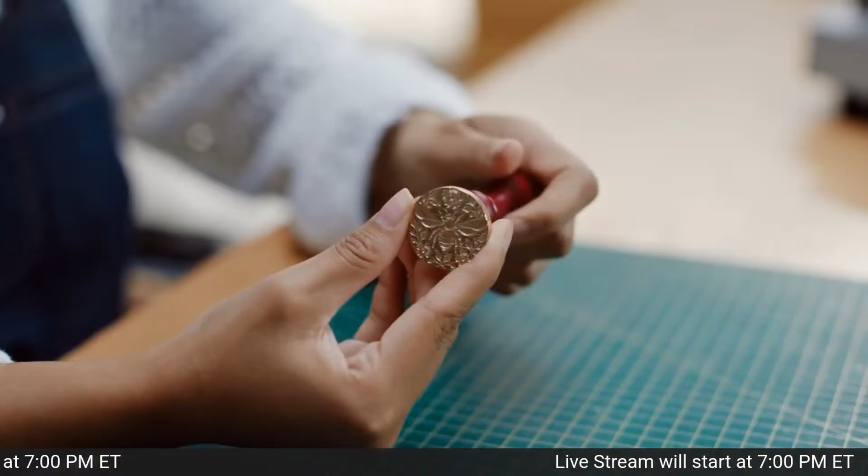And I'm on a roll. If the leaves turned blue and all the rivers dry, all I hear is you're at my side. And when I think of you, all I can do is try to keep steady. Thought of you, thought of you.

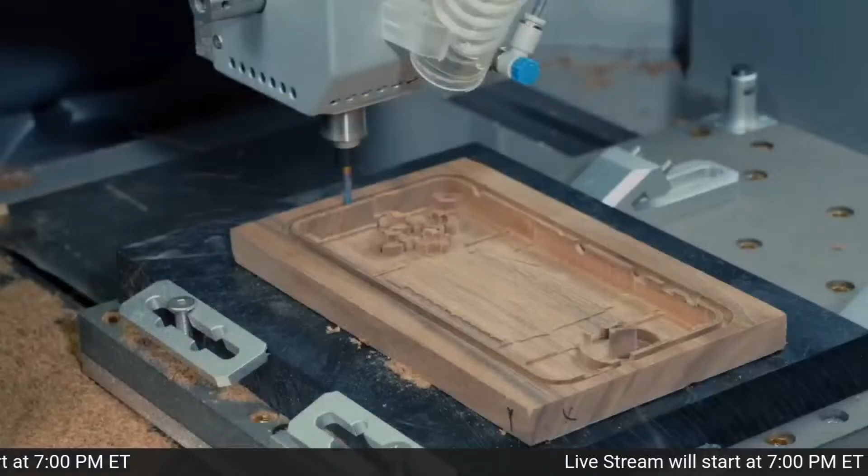And I'm on a roll. If the leaves turned blue and all the rivers dry, all I hear is you're at my side. And when I think of you, all I can do is try to keep steady.

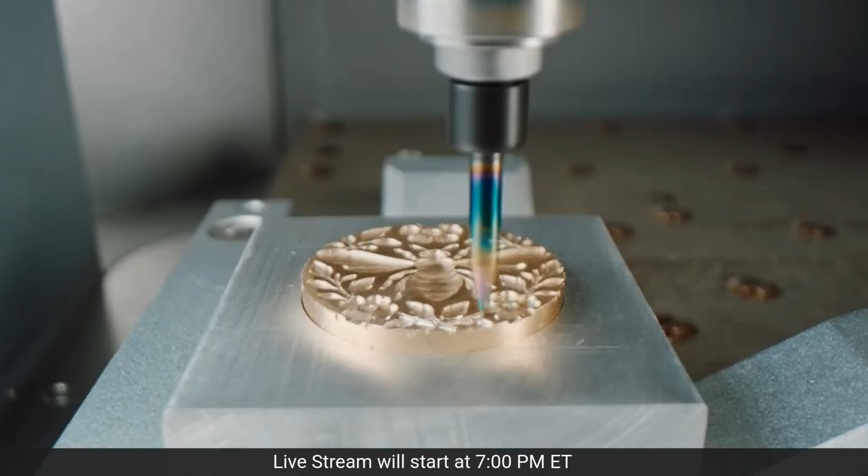And I'm on a roll. If the leaves turned blue and all the rivers dry, all I hear is you're my side. And when I think of you, all I can do is try to keep steady. Thought of you, thought of you.

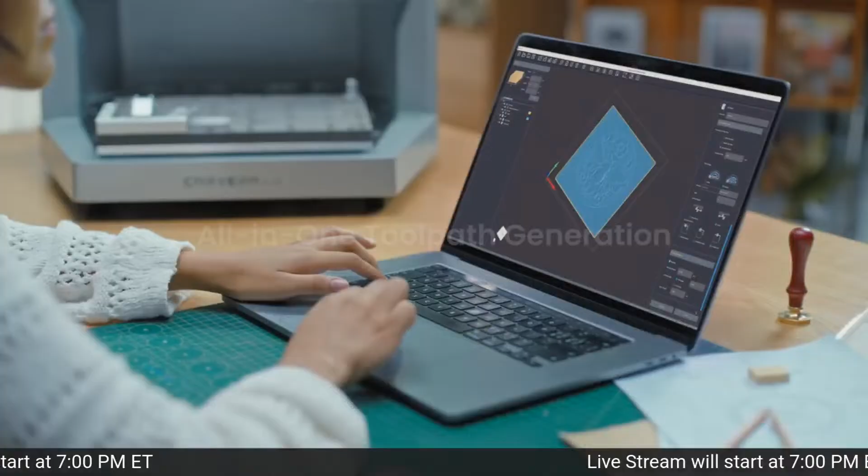And I'm on a roll. If the leaves turned blue and all the rivers dry, all I hear is you're my side. And when I think of you, all I can do is try to keep steady.

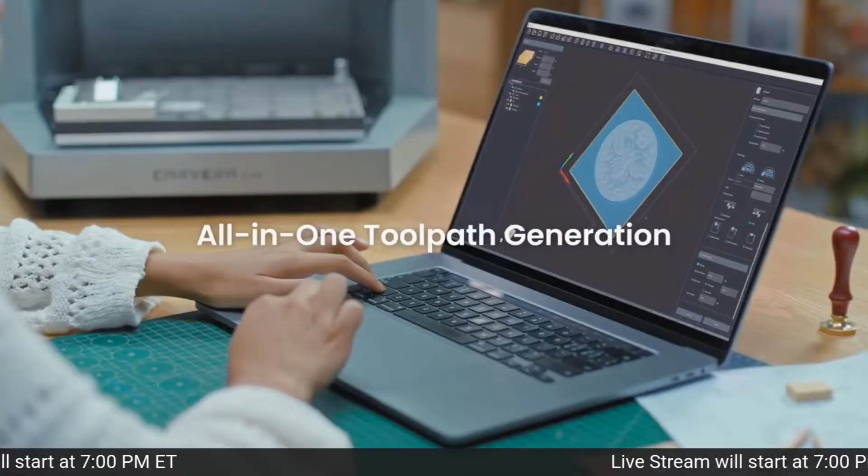And I'm on a roll. If the leaves turned blue and all the rivers dry, all I hear is you're my side. And when I think of you, all I can do is try to keep steady. Thought of you, thought of you.

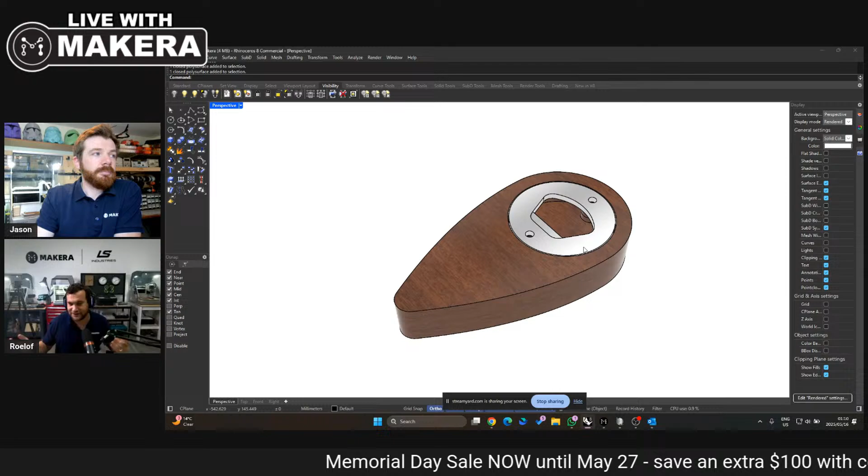As much as we like CNCs, maybe you guys can say if we have like a full-on live stream where we're just milling things for like, maybe a 24-hour live milling stream. How's that, Jason? What do you think of that? I think that's something we'll put forward for the future here. Yeah, maybe I'll put a bed down here as well, something like that, so it's just machines running.

So basically I kept it simple with this. It's a wooden piece, I didn't put any chamfers on it, it's just a cutout. And then I've got an aluminum piece, brass, or like an aluminum insert that just goes into this, and then that just gets screwed to this.

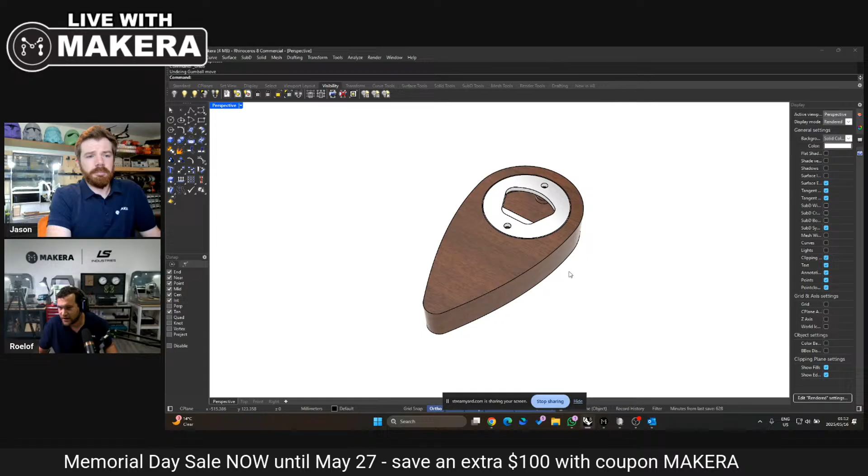Obviously, you can interpret this and change the model. The model is available on our wiki, so you can have a look at that. You can also find the DXF of these online, so there's many ways you can import this into the CAM software—either in a 2D file or a 3D file. I'm going to focus on it as 3D, just to focus on those features in the CAM. But there are tutorials; Jason's putting things out to make this in 2D and also in 3D, so there's many ways you can look at this.

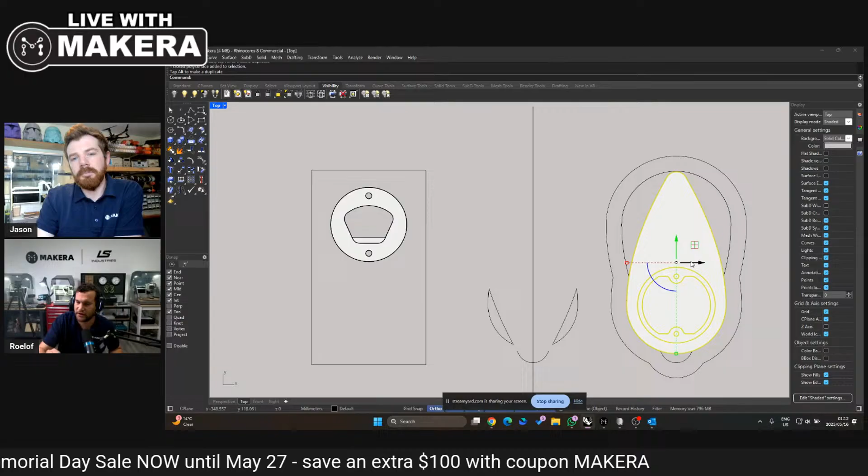A cool thing I want to show you, if you're going into 2D, you can actually do this in 3D too. This is just the top view of this model. If I place this model and put an offset here of an eighth of an inch bit, a cool thing—if you want to mill this double-sided—is you add an offset to the mirrored side of this part. If you fit this in with the correct offset, you have an insert that's milled like this. You can rotate this part and place it into the cutout of the part, which actually saves materials—you don't have to cut jigs or alignment pins.

It's just a different method of doing a double-sided mill, but we're not going to focus on that. That's just a fun thing I wanted to show you guys that I figured out with this part. Okay, so let's get right into this 3D part.

I'm going to actually open up the CAM software. First of all, as you can see here, let's go back to the model. What I did here is I actually drew in the size of the stock.

I already mounted my stock to the material and measured it. You have to make sure the thickness is 100% correct. If the thickness you set up in your CAM software isn't 100% accurate, then you're going to have air cutting or things like that. So you have to make sure these values are correct.

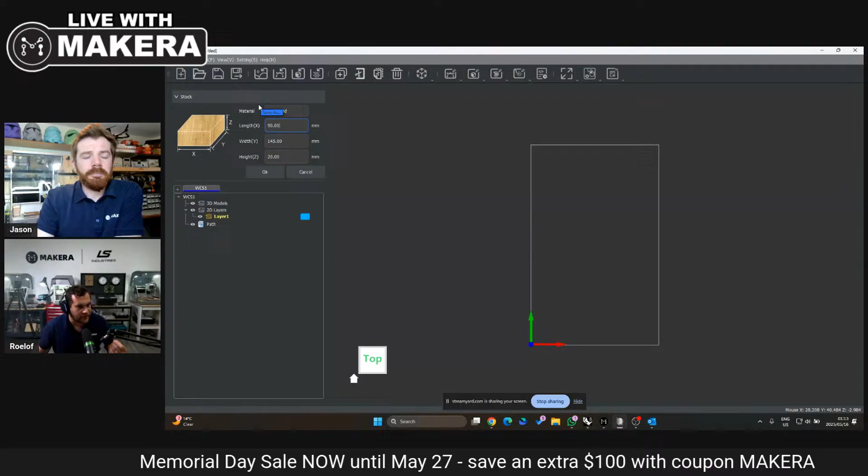Obviously we're going into hardwood, and my width in X is 90 mil, Y is 145, and 20 mil thick. And then I'm just going to import the 3D model, the handle, open up, and there we go.

Now, to move this around, I just hit M on my keyboard—it's an easy way to move things around. Then you can quick align the stock, which is already done. I always have a look at this in 3D just to make sure everything is placed correctly. If you look at this, the stock setup is exactly the top surface of this model, and the bottom is exactly the bottom surface of this model. So just keep that in mind when you're doing this.

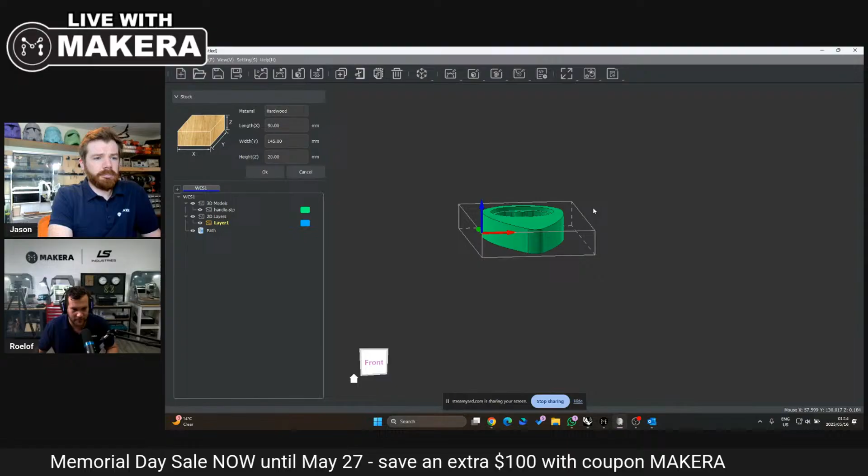You can rotate, scale, mirror—you can do other things with the model here. Mine is already in the correct position, and my origin is also in the correct position, as you can see here. Now this has already got a built-in offset, so you can see a measurement here and a measurement here.

If you want to double-check these measurements, you can always jump back to the CAD to make sure this size and that size is correct. If you go back to the model, to make sure what sizes of tools I'm going to be using, you always have to look at the model and be like, okay, this is 4 mil, so I can cut that with an eighth-inch tool, which is 3.175. So you always have to make sure the tools you use are the correct thickness for the part you want to mill.

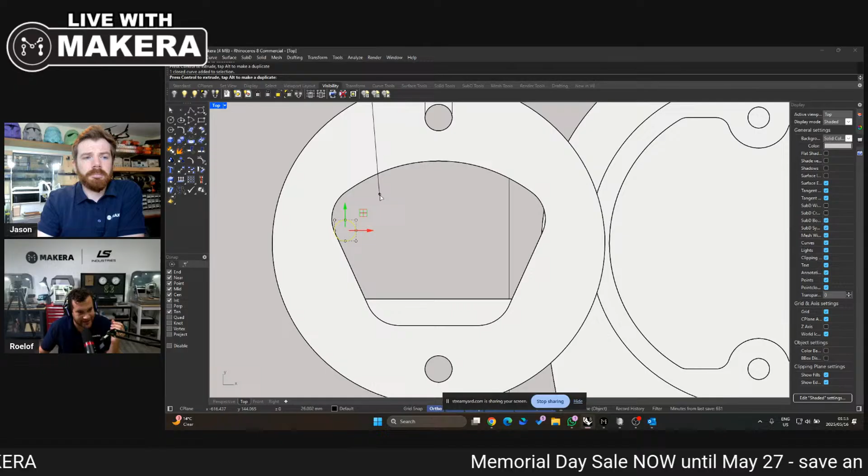You can also, if you want to make sure things work out 100%, say the tool is 3.175—I actually draw a circle representing the tool. So if you imagine the tool can fit into this... if you have, for example, a text or something smaller, you can check, is this bit actually able to cut that radius? Over here, I can actually see it will cut that radius.

The only part that will be different will be a small radius on the inside of this corner. At the top, it's just a little pocket, a 0.5 mil pocket. So that radius can still follow. The only difference on your part is the inner radius of this angle.

This is a fun way to check, or a good way to check if the tool you're using can actually cut the part. If the tool is too big to cut a hole, it won't give you a tool path because it's not possible to cut it.

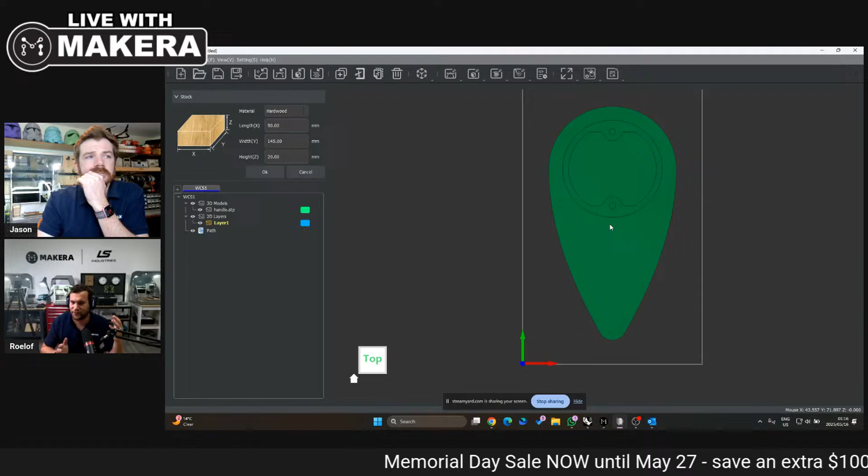So let's jump back to the CAM. I usually jump back and forth between the CAM and the CAD software just to make sure everything is aligned and everything is the way that I want it to be.

Okay, so let's go into creating a toolpath. I'm going to go to 3D and start off with a pocket, which is this first step, from the top surface to this step. I'm going to create a 3D pocket. Let's delete this tool for now, and add single flute non-metal, 25 mil, 3.1, in hardwood. I select this, and the start depth is at the top of the top surface.

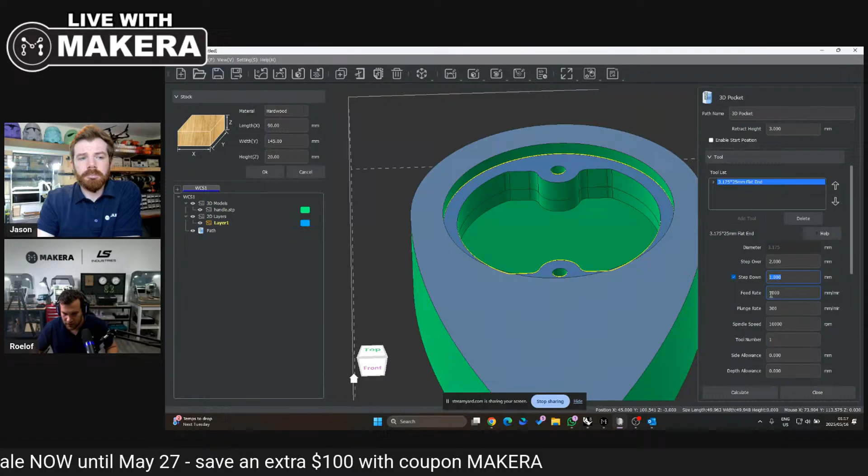Clearance height, I'm not going to mess with that, it's already been set up. Step over 2 mil. Step down is ticked, so every step down is going to be 1 mil. I think I'll make this 2 mil. Feed rate, I'm not going to change anything here. Spindle speed is already set up for the material.

I'm going to cut this as an offset strategy. The difference is parallel will machine this pocket horizontally, and if you use an offset it uses the circular feature, so it mills from the inside in a circular motion. We're going outside in, that's fine, on the inside of the boundary, and we're not going to add ramping in this wood. Then we'll calculate this.

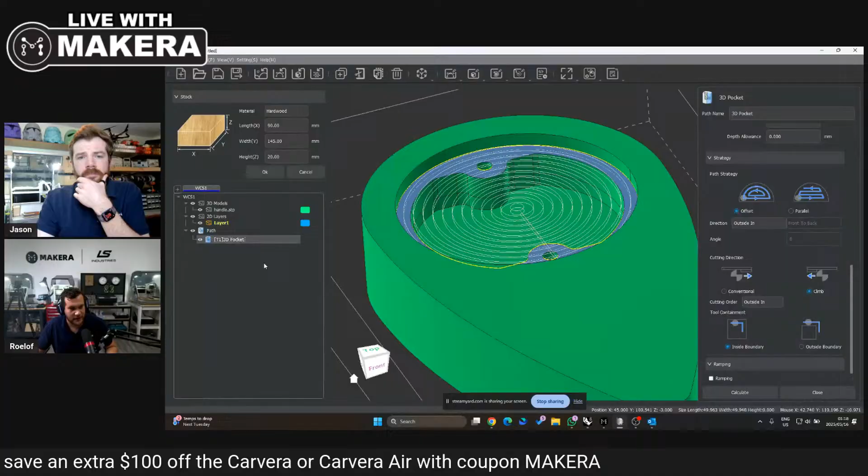There you can see we have a 2 mil - that top white line is the 2 mil, and then it will finish off with the second line that covers that. So that's the first pocket and our first tool. I'm also not going to use a tool change in this part because we're just focusing on making this, and I can make this with only one tool, so there's no need to complicate it. We're happy with that.

I'll close this, and go back to 3D path, and do a pocket again. I'm going to select this bottom surface. Now all the information it has is the bottom surface, so at the top here you need to tell the CAM that it doesn't have to mill the top 3 mil, because I already did that in the first pocket. So my start depth is at 3 millimeters.

Is everybody still good? Is my sound okay? I'm just going on now. Yeah, Jason, you're doing well, Roelof. All sounds good. All right.

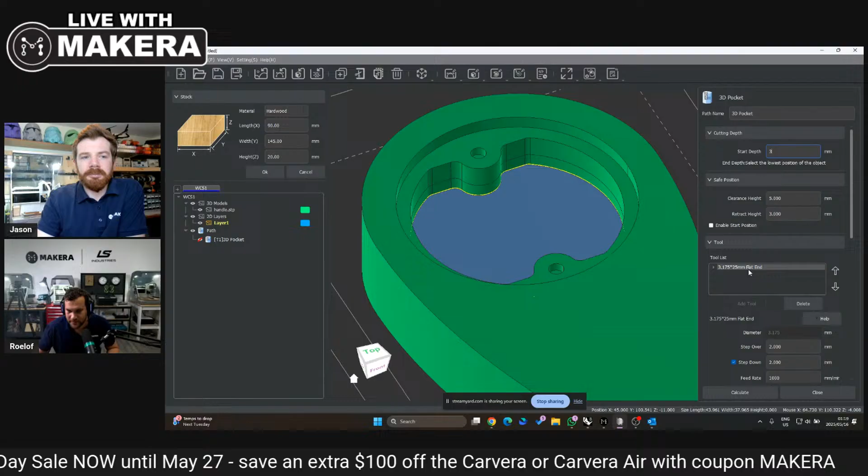I'm going to start at 3 mil down from the top surface. Clearance height is already set up, that's the correct tool, step down 2 mil, and that's set up. I'm also going to do the offset the same way I did earlier: inside boundary, no ramping. Calculate.

Then you can see from the top, it uses the contour of that line on the outside of the surface to calculate that. So that's pocket number 2. Let's hide that, close, and then we're actually going to do another pocket.

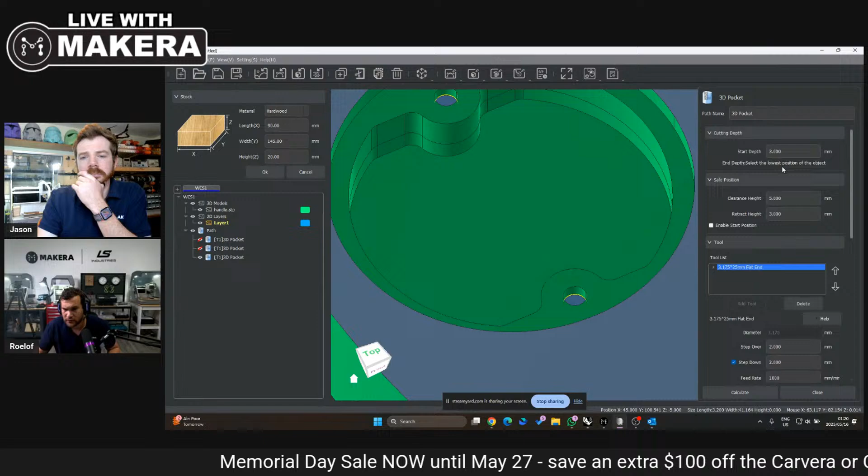I'll select that surface. Start depth is at 3, and then clearance height - I'm using that same tool. That's fine, so it'll go in a circular motion and create that pass. It's also an offset inside the boundary, and let's calculate that. Let me just make this 0. There is the line.

Okay, so that's the little guide for the holes for the screws. Let's hide that. And then finally, we're going to do a 3D path.

We're going to do a contour just to cut out the part. I'm going to select the objects and the part, generate the contours, which is only this outline. I select this outline. Start depth will be on 0, end depth offset I'm just going to make this -1, so it actually goes through the material. And you can actually cut out.

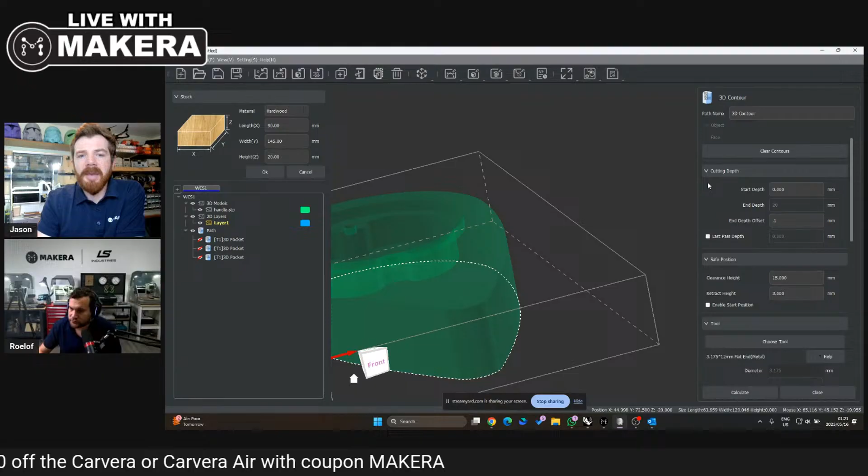I want to point out to everyone what Makera CAM really just did there. When you generated that contour, which is a pretty cool thing, and you'll see us do this again later on with the cap part, Makera CAM basically scanned the 3D model that was imported and found the edge profiles. Because when you create a contour cut, you really want to follow some type of vector line, like a 2D line, just to either machine the outer part or clear something out on an internal feature. So Makera CAM will automatically generate those around your imported STP files to make creating different toolpaths really cool. Roelof just selected the whole object there, and it automatically found the outer profile.

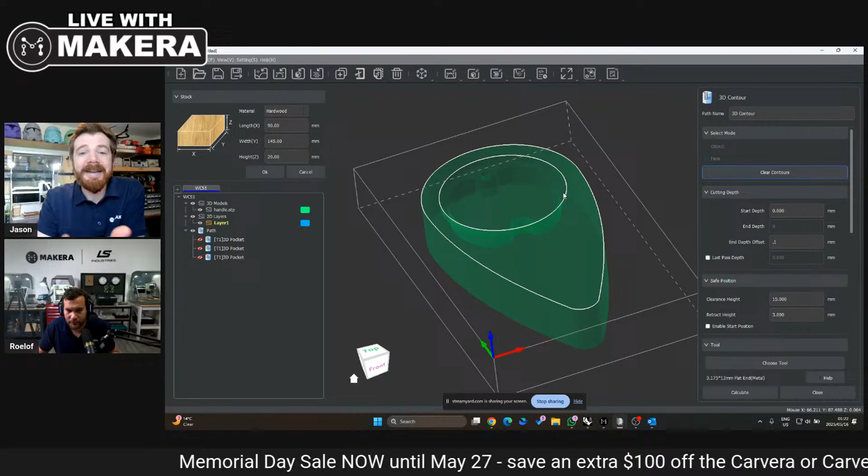But you can also select faces and things too if you want to generate contours, let's say for example a chamfer or whatever. So you'll see when he clicks on that top face, now it found the outer lines of the pocket and the other edges, which might be handy to do some type of chamfering pass or something like that, which we're going to do in another part later on. I didn't want to jump in there too much, Roelof, but that was a really cool feature that I think a lot of folks don't realize how easy it makes for creating your toolpaths on a 3D model.

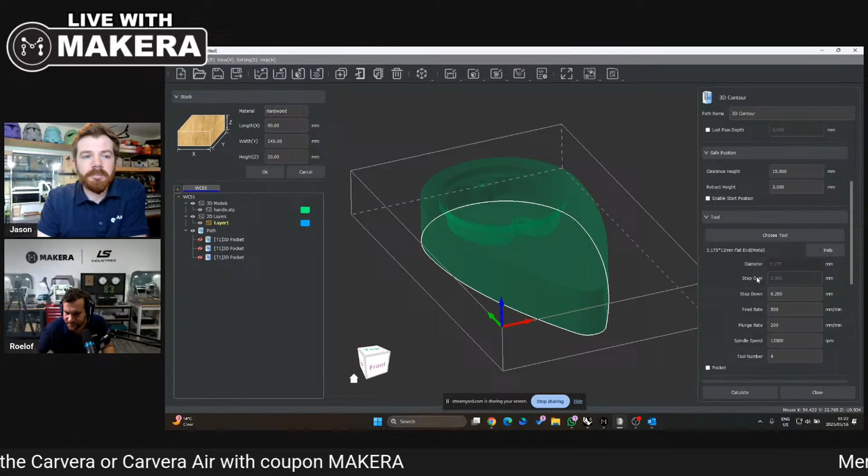Yeah, and the STP file is usually flat surfaces, so you can use this to capture many different areas and then specify this specific area on that part needs to be milled this way and that way. So it's a pretty powerful feature. For now, I'm just using it as an outline, but it can be used for many different things. So yeah, cool feature. Let's just jump back into the tools.

I'm gonna go non-metal, single flute, 25 mil, hardwood. Select that tool, and I'm going to step down 2 mil. I've already milled this, and I've seen that 2 mil is fine into this material. I'm not going to add ramping to that. I will add a tab to this though, and the strategy should also be on the outside of that contour, just to make sure it's exactly the same size that it should be. So I'm not going to put any offset to that.

Outside, let's add some tabs here. I'm going to do a triangle, and I'm actually going to increase this tab to, let's go 3 mil, let's go 4 mil. It's wood, so you can leave it quite some material to hold it in place because it can chip away that tab. In aluminum you can go a little bit less on the thickness of your tabs, or on some metals, because it actually holds it in place. But for wood, I recommend just increasing it a little bit more, and you can obviously sand it quite easily.

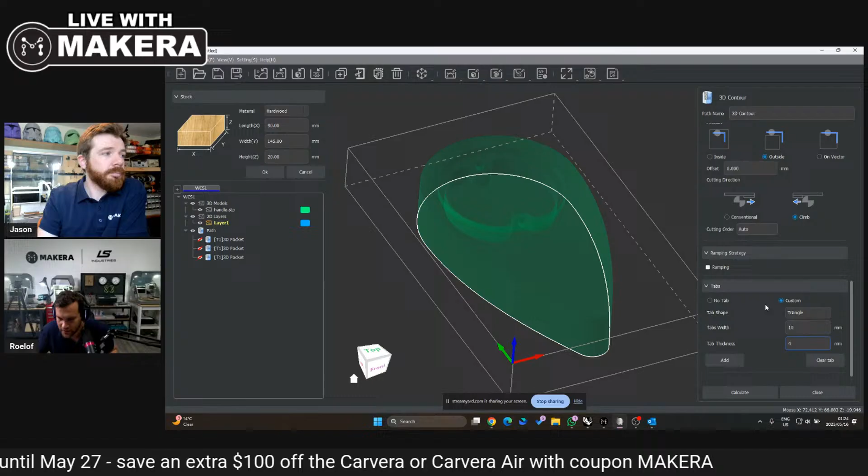So let's do a top view here. Oh, I don't think I've selected this. Let's just clear this tab, exit add. Okay, let's add a tab. I also recommend adding the tabs kind of concentric, or parallel to each other. To remove it, you can kind of pivot it on that axis to actually break it out. So if you put one here and there and there and there, it's harder to get it out. Depending on the size of the part as well, if it's bigger, you need a lot more tabs. So let's add that, let's calculate this.

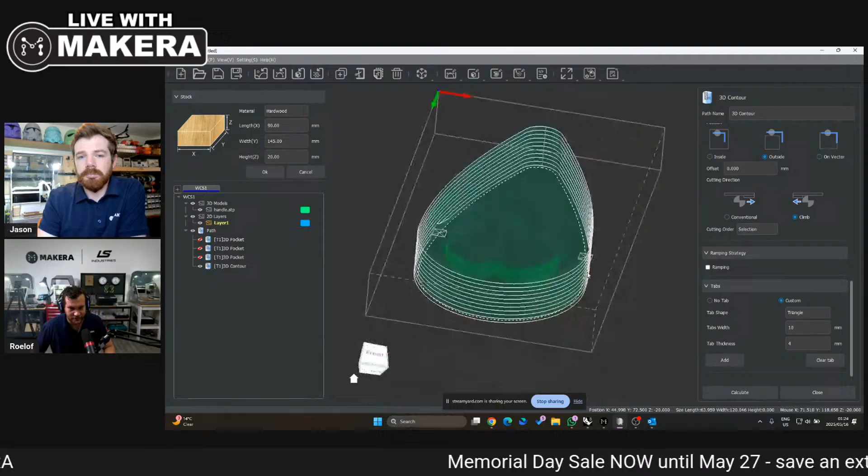And then what I'm going to do is just check the 3D viewer here, and I can see the tabs cut out there nicely and the tabs cut out there nicely. And if I do a front view, you can also see that it's cutting through the material. Now that's the end depth offset that I've set over here.

So that is the file. We have the pocket, we have another pocket, we have another pocket, which can also be a drill, but I'm just doing a pocket for that now. And then we have the outside contour. So as simple as that.

I'm going to go here to toolpath. I'm going to select all of them. All of them is the same 25 mil, 1/8 of an inch tool. So let's export that. I'll call this.

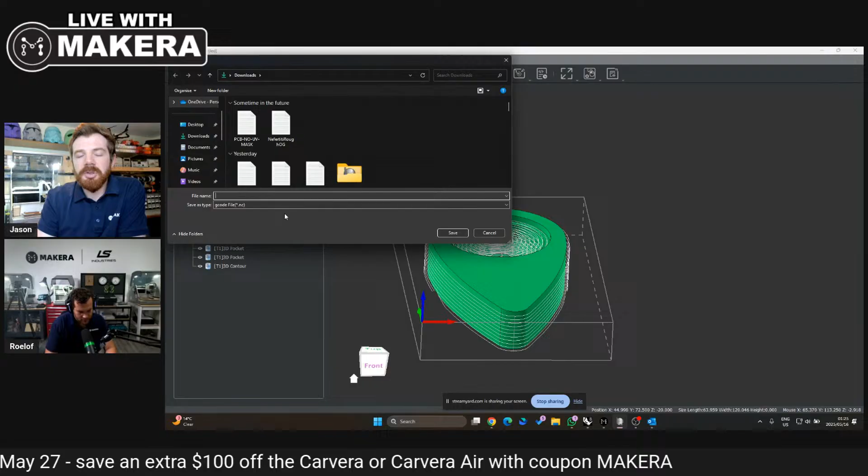As you save that G-code file, I want to point out a new update to Makera CAM. When you export your G-code, it shows you your tool list and tool numbers, and will warn you if you make a mistake choosing multiple tools with the same tool number. But it's easy to modify your tool numbers if you want a different order, or to match your Carvera's automatic tool changer. That's a pretty handy feature Roelof just showed.

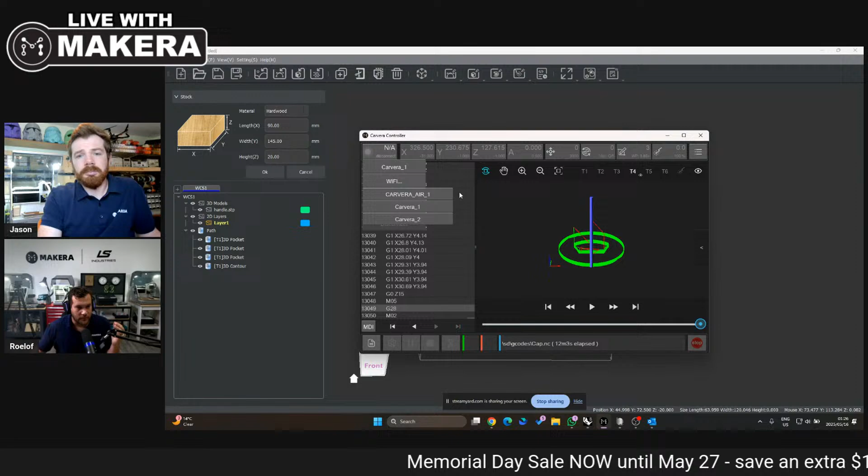Great, thank you. Okay, so now we have the G-code saved to my downloads folder on my computer, and I'm just going to connect Wi-Fi to my machine. I've already set up the stock on that machine. Let's connect again. There we go. When I connect to the machine, I always do a little move in X just to check the connection's fine, and we are fine. Now I'm going to open the G-code and upload a file, handle bottle opener, and just upload and select, which is also quite a new feature. You don't have to upload separately and then open it, you can do it in one shot.

The reason we upload files directly to the machine is that it saves it to the Carvera's internal hard disk, which means that if Roelof disconnects during machining, or if Wi-Fi goes down, or if you're plugged into your computer and the computer goes to sleep, the Carvera will carry on. It'll keep machining even if you disconnect from your computer, which is a really reliability feature for more automation and good results in machining.

So the next thing we'll do is open the run config. I've already mounted the material - if you want info on that, we have YouTube videos and tutorials on how to mount stock. My stock is already 20 mil throughout, so it's already been planed, so I'm confident I don't have to do auto leveling on my machine. That'll also save us some time. I'm not going to put offsets into this because the material already has that offset, and I don't really have to scan margin just to check I clear all the brackets, then I'll auto Z probe in that location, and then we're just going to hit run.

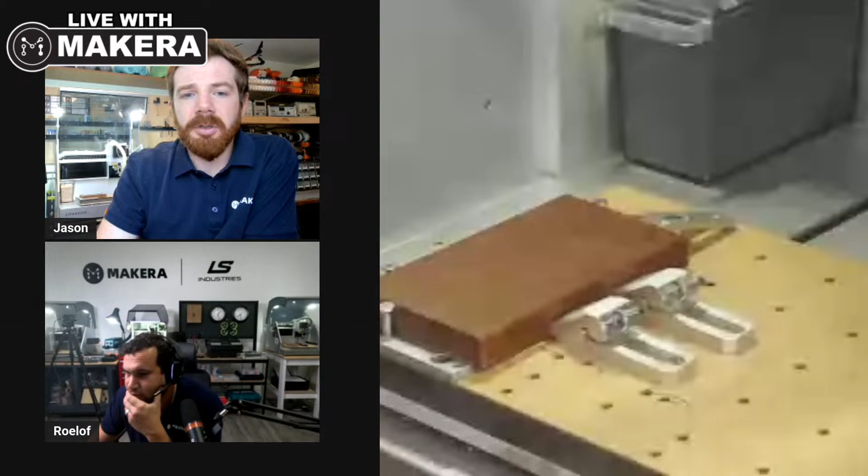But before I hit run, let's set up the machine cam. Yep, I got you here. So let's swap. All right, so you can see we have some - is that walnut in there, Roelof? What is that wood? This is rosewood. Ah, it's quite a hard wood.

And I'm going to hit run over here. Basically what it's doing is just dropping the older tool. So I'll talk us through here. With the Carvera right now, it's going to do the probing sequence and the scan margin automatically. When I talk to folks during training, and we discuss what makes using these CNCs so easy and more intuitive than a typical CNC milling machine or router, it's really this calibration feature that it's about to do entirely on its own.

So the Carvera is grabbing the wireless probe from its automatic tool changer, and you'll see it come into shot in just a second. It's going to first do that scan margin, which we always recommend, because it allows you to see exactly where your part's going to be machined and foresee any possible issues before the head lowers - any collisions with clamps, wrong offsets, or stock that was too small. This is a really powerful feature where you can see that little laser pointer coming into shot now, tracing the perimeter of the handle as we go around. That's showing us the handle is going to be right there on the stock, a quick way to double check you're in the right spot.

And of course, while we're using the Carvera Air would do the same, but with its wired probe instead of the wireless probe that the Carvera uses. But mechanically, it's essentially the same part, just a different way to connect.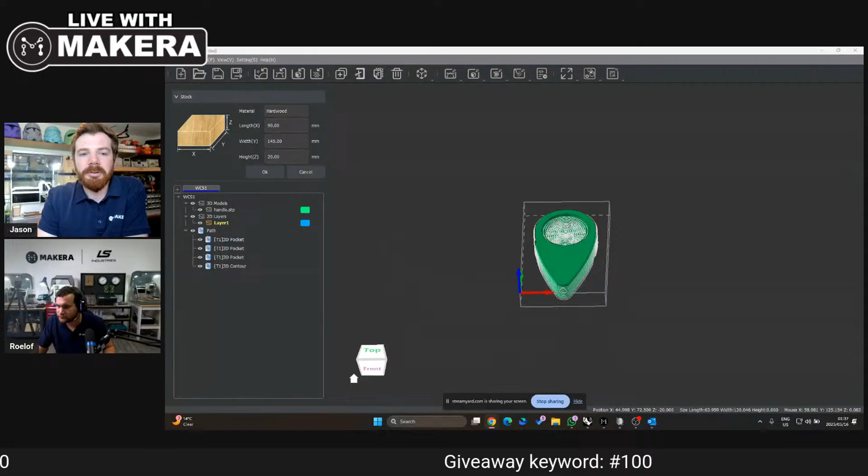I think though we can move in to start to prepare the next part there - the roll off the cap part. We have one more part for this bottle opener, or else we're not going to be able to open anything. I think I have to hide this cam again. That's okay, just to show my screen. Yeah, we can check in on the machine cam later on. No problem, okay, so back here.

Okay, I'm just gonna go File, New. Do not save - actually, you can save it. I recommend saving it, you know, things can happen, bits do break. So if you quickly want to change or remove one of these tool paths - you saw how quickly it is to export another file. So if something happens on the first pocket, or you finish the first pocket and something happens on the second pocket, you can just go back to this G code and change or remove the first one. And as you can see in the export window, you can select which ones you want to keep or leave.

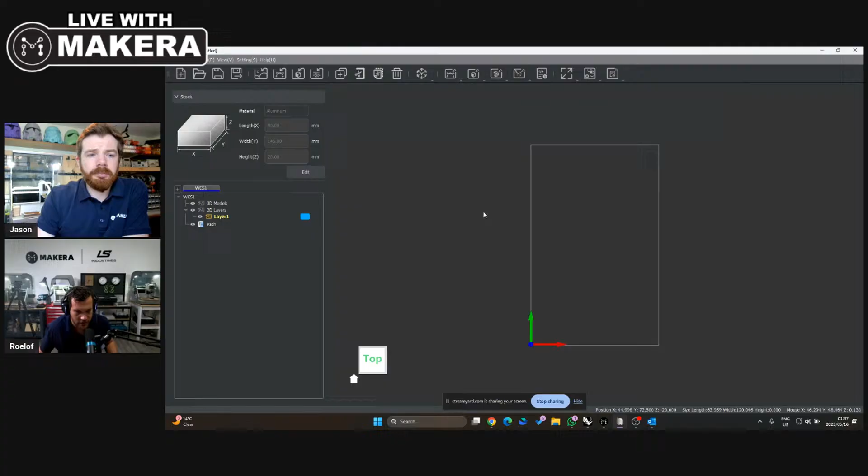All right, next part - import 3D model, and this is the cap, a step file. Let's import this. My positioning is already pretty good. I know this, but let's go back to the cam just to make sure what we've got here. Now I've got quite a big piece mounted to the Carvera Air that I'll use to cut this.

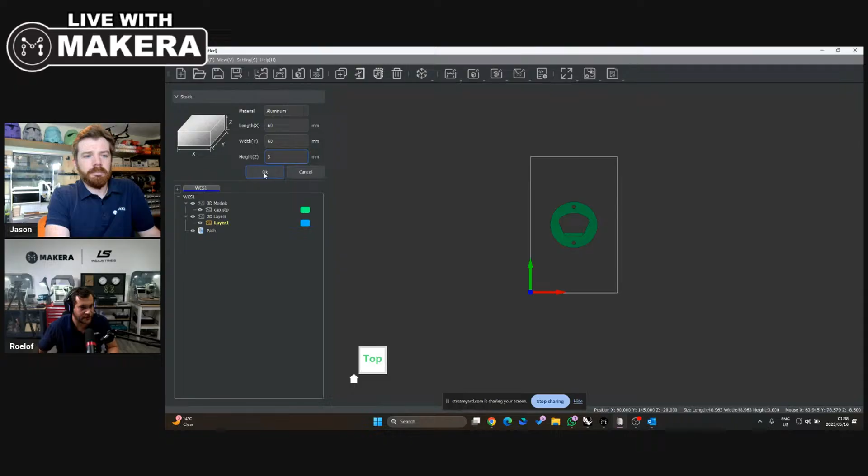I'm not necessarily worried about the stock size, because this stock size I know is 3 mil, and this is just under - I think the hole on the handle is 50 mil, so this is just a little bit smaller, just so it fits in there. So that's 50, let's call it 60. 60, and this is 3 mil. Then I'll hit OK, and I'm going to select this, quick align stock. Just to check if everything's aligned - I'm at the top, I'm at the bottom. Happy days, let's start milling this.

So it's a similar process to the handle. I'm going to go 3D path, first I'm going to do the pocket. Now, looking at this part, there'll be 3 operations. Firstly, it will be this 0.5 mil pocket that I have over here. Then we have an inside cut, which - these holes will also be just an inside cut. This will be an inside cut. And then an outside contour with some tabs. Actually, what I'll do here is put a tab on the middle part as well.

Because the inserts can go flying, it's a dangerous thing. So just keep an eye out, and remember that if you have parts like this that have small inserts or offcuts, they can get loose while you're cutting the inside.

Roel, while you pause there, I'm going to show machine cam, everybody. You can see that we are on a contour pass there. You'll also see it's going to lift for the tabs as we get deeper here. So that handle is almost done. That was a lift for the tab right there. Working our way around, making a bit of a mess with the lid open, but almost done with our handle here. Here we go, we're going to lift for another tab. That was a tab lift, just like that. And back to him, all right.

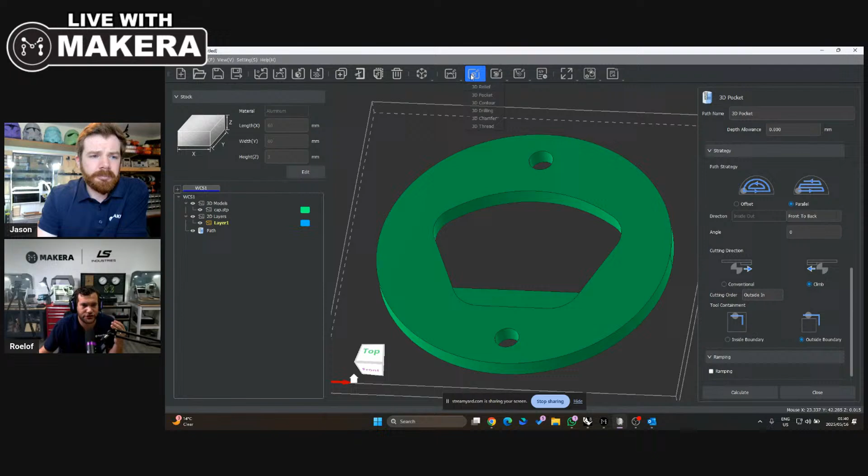So let's start our first operation, which is a 3D pocket. Like we did earlier, I'm going to select this surface because that's the pocket I'm going to do first. Start depth is on 0, which is the top surface of this part. Then over here we can select our tool, which will be for metal - a 12 mil, 1/8 of an inch, in aluminum. So I'll choose that.

And then step down has already been set up. Okay, our machine is done. I'm just going to jump back over here and switch off the vac. And then we're back over here. All right.

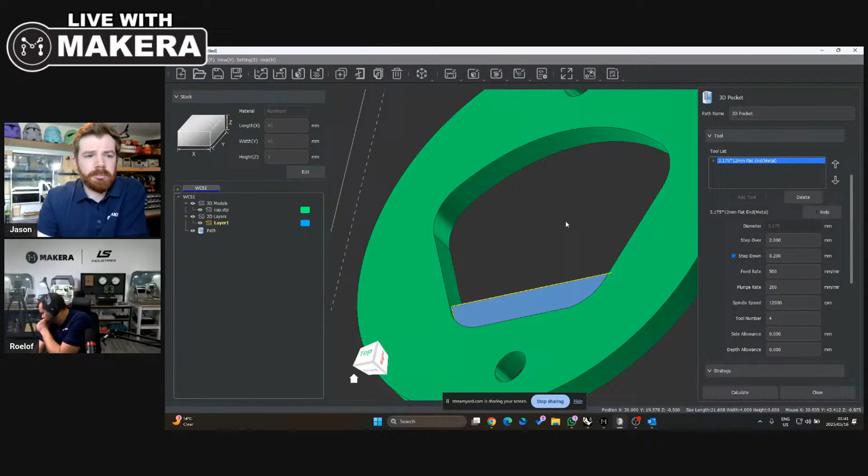So step down is 0.2. That's already been set up, and step down has been ticked, so we just want to do it in sections. The depth of this part is a 1/2 mil, so it's 0.5, so we'll do like 3 passes. Feed rate's already done, spindle speed I'm happy with. This is set up for aluminum, so we don't have to change anything there. Obviously if you do more advanced stuff, you can upscale the values, but to get started, this is a good starting point for all the values.

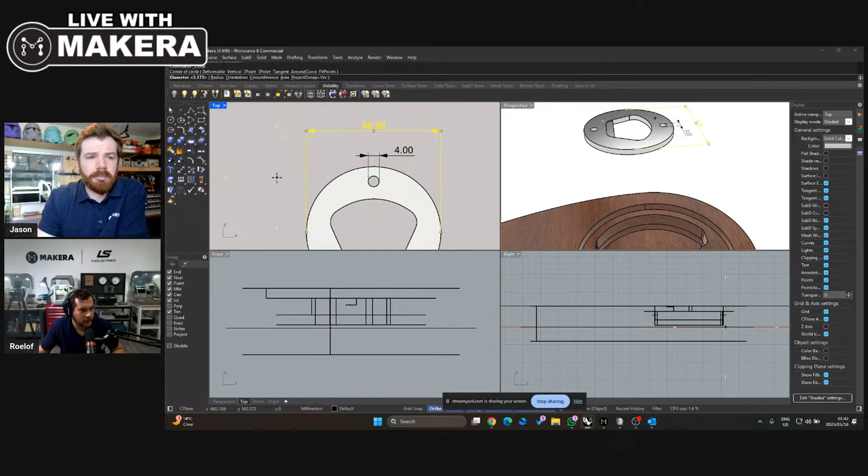And then we're going to do an offset into this part - inside out is fine. Over here, for this part, if you say inside boundary here and I calculate it, it's just going to cut that inside part of the pocket, but that will leave us with a radius. Let me show you, let's jump back here. If I do that, you'll end up with a big radius here, if you do that.

So I actually want to cut it so the tool passes this inside and cuts out that entire pocket. So if I go back here and select outside boundary, it still looks at this end profile of the surface here, but it actually extends over. If I calculate it here, you see the difference - it extends over that edge to give you a good clean angle here. So that's the first part.

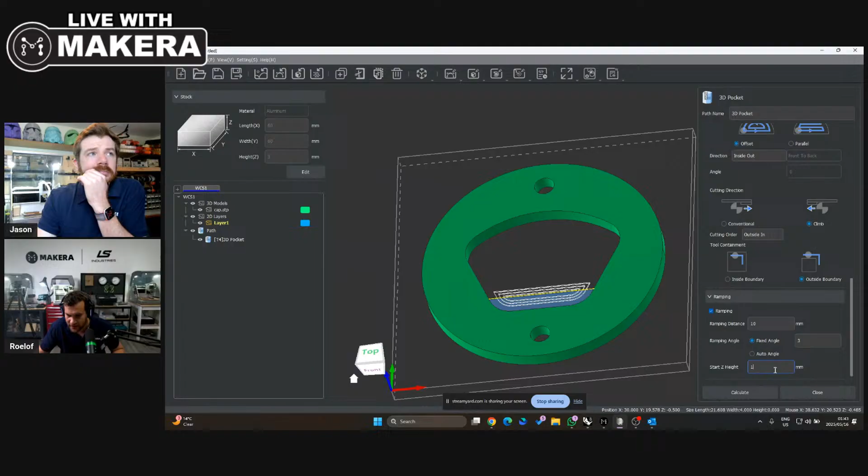I'm going to add ramping to this, with a fixed angle. Start height is at 2 mil, and the ramping distance has already been set up, so I'm happy with that. I'll calculate that in, and you can see there are some angles programmed in there to take it a little easier on the tool, so it slowly feeds into the material and doesn't drop or plunge into it.

Okay, so that's our first pocket, and then we're going to do a contour. A contour is best for this, and what I'll do is generate the contour of the entire object. I can also select the bottom face - it'll be the same.

So let's generate the contours. I just need to select this, generate contours. I will select this line, this line, and this line. Then we will start at the top, and give it an offset of 0.1. Clearance height is already set up. The tool is the end mill for metal, so that's already fine. The step down is 0.2, so we're happy with that. Feed rate's good, spindle speed's good, and the tool number's good.

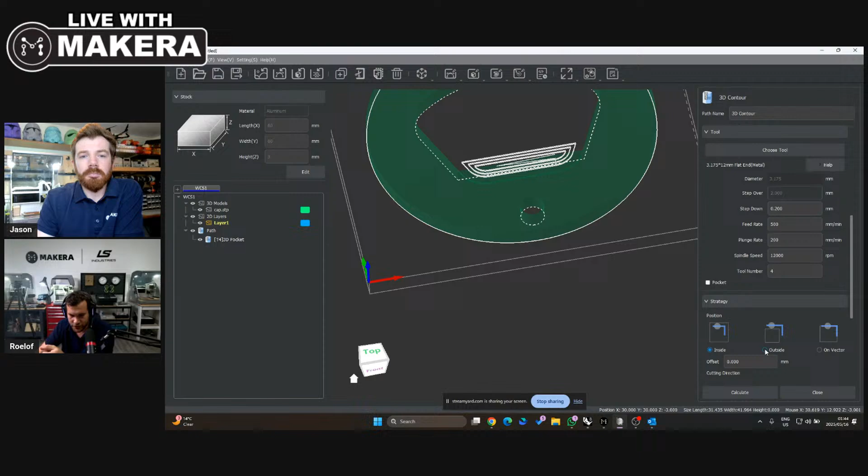And here we're going to cut on the inside of these contours. If I calculate on the outside by accident, you'll see it'll actually change the size of the hole and make it a lot bigger. But if I do inside, calculate here, it'll just be the inside pocket, and it's going to spiral down to cut the holes and cut the inside of that pocket. So I'm happy with that.

I will also add ramping to this strategy, and oh yeah, like I said, I will add a tab. So let's add a tab over there - one tab, thickness 1 mil. Because I'm going through the material by 0.1 millimeter, it'll actually have a tab that's 0.9 millimeters.

I don't know, I'm coughing like this now.

Now I can see the tabs being cut in there. I can easily cut that off, and it's also on a nice surface, so I can actually easily sand away a tab. If you put a tab into this corner, it'll be quite hard to get in there with a file to sand it. So you just need to strategically place your tabs, otherwise you're just making your life a little harder in the future.

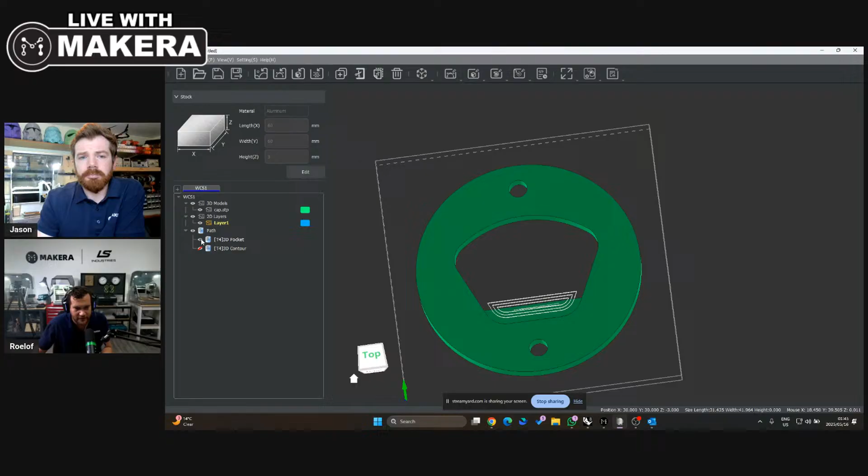Okay, so that is our inside contour. Let's hide that, and then finally we're going to do our 3D contour. We will generate it - I keep forgetting to select the model. And then I've got the outside contour here. We will start on 0. The depth is the same as the previous one. This is fine, and the tool is the same.

The settings are the same, but here I will do an outside cut, so I will calculate this. You can see it's on the outside. Everything looks good. If I look at it from the front, I can see it's cutting a little bit through the material, so I'll have a clean finish.

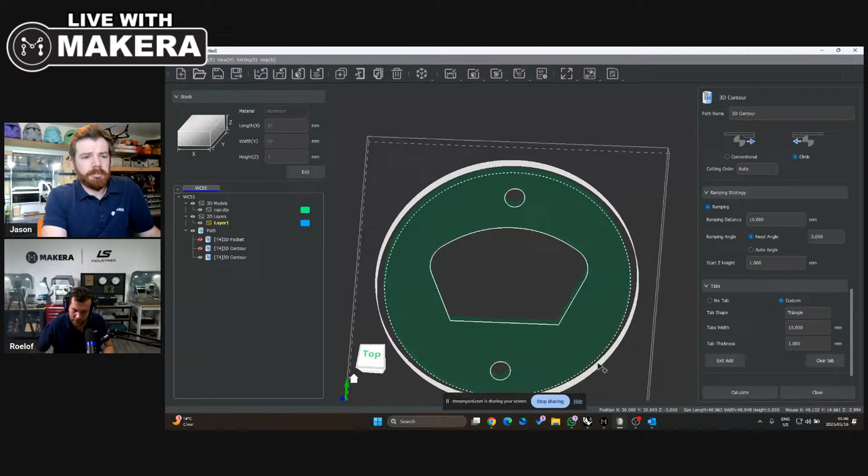But I will have to add a tab, and I will also add the ramping. And I will add a tab, just do the tab here, and let's do a tab there. The tab is 1 mil thick by 10 mil, so with the pass through, it'll be 0.9. So let's calculate that again. I can see the tabs being cut in here, the ramping's there, and we're good to go.

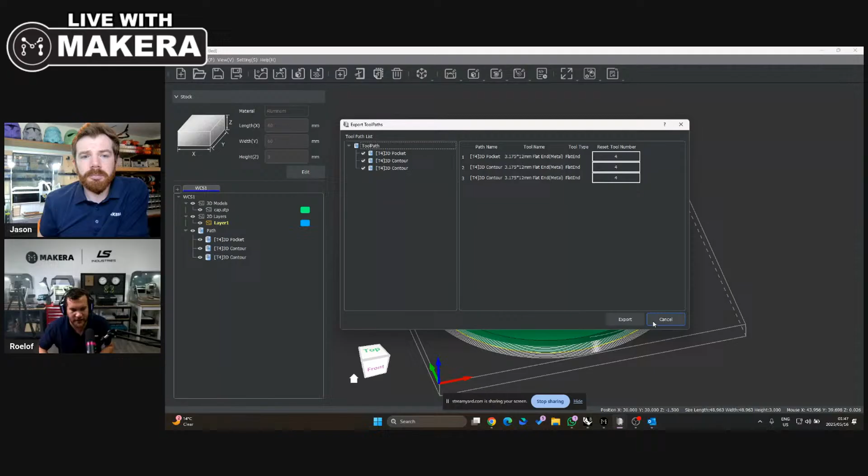So I'm going to use the same tool for all of these operations. There's not really a need - I could use a drill bit for these holes, but it's not necessarily needed because I'll be spiraling down. You could throw a chamfer on there too if you wanted to. Yeah, you can definitely put a chamfer on here, it's as easy as going to chamfer.

And then I will generate the contour of the object. Then I've got that line, and then I can go through the settings. It will be a chamfer on the outside. I'll calculate that - I needed to select the top surface.

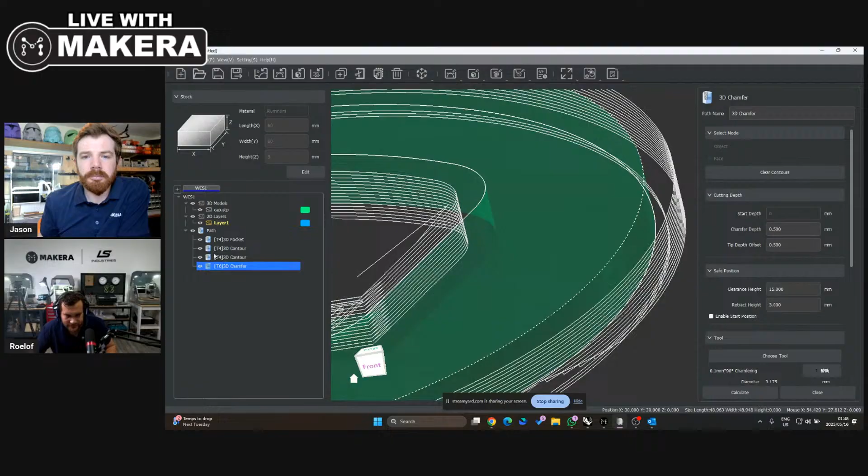My bad, let's just change this. Clear contours, I'll do a face. Generate contour of this face, so then I'll use that line. Let's just hide the rest, and that'll calculate, and that'll actually put the chamfer on there.

But I think for timing's sake, I see we're already almost past our time. Yeah, we don't have timing to do that. I'm not going to add that now.

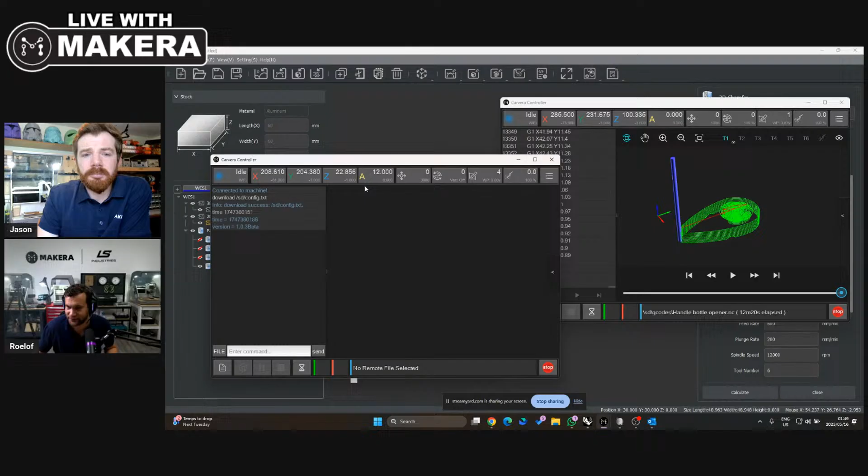So over here, I'm going to close this because we're done with this guy. And then I will upload a file, cap, bottle opener, upload and select. And there we have our file. Let's just do a quick machine cam, so I can actually do a clean up here and show you what's going on here.

I think my dust - yeah, I was going to say, I'll narrate. Why don't you mute yourself there real quick, Roelof. And yeah, so it looks like we have our handle part. I can hear you, and I can also talk over here. There we go. Here's the handle part, hopefully that's not too loud for you guys. All right, perfect. So we have our handle part there that Roelof's just going to remove using the toolkit.

Some side clamps and things like that, right? So there's a variety of that. Most of these clamps will come with your machine, and you could also order more clamps and things like that from our store, or even manufacture your own if you'd like.

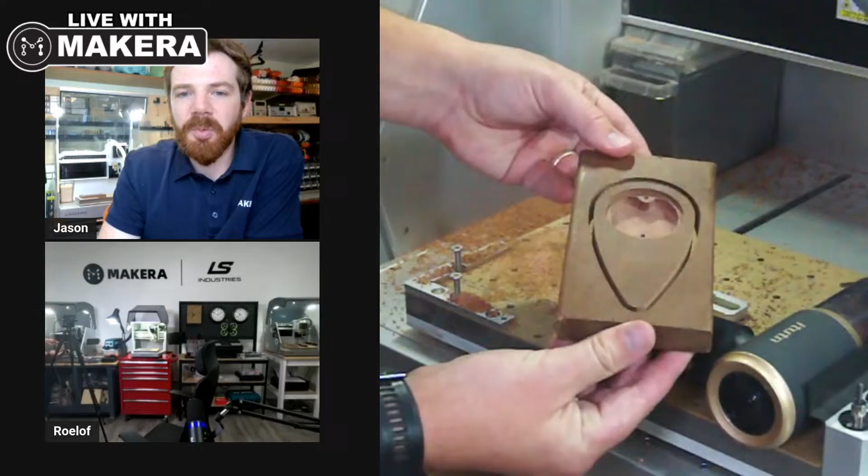And look at that. There we go. There's our handle there. Nice piece of wood. Good choice. And look at this, I did this tab so well. I can just go like this. Perfect, there's our part.

A little bit of sandpaper, I'll do a little cleanup there. I've got another cam set up for that afterwards. So nice. Let's move over to this machine.

Sorry for my camera work over here. I'm going to try my best to do this as smooth as possible. It was flawless. New machine. Flawless. Oh, great stuff. Yeah, there we go.

Perfect. Okay, so basically in the controller, I think we can kind of keep it like that. We can keep that angle. I think we can just show you too. So over here, I'm going to go run. I'm going to put a little bit of an offset to this. Let's add a 5mm and a 5mm here, just to give it a little bit of clearance.

And then I'm just going to hit... I'm not going to do auto leveling on this, it's not needed, I know the material is pretty level throughout. I'll do auto Z probe and I'll do a scan margin. So let's run this. All right.

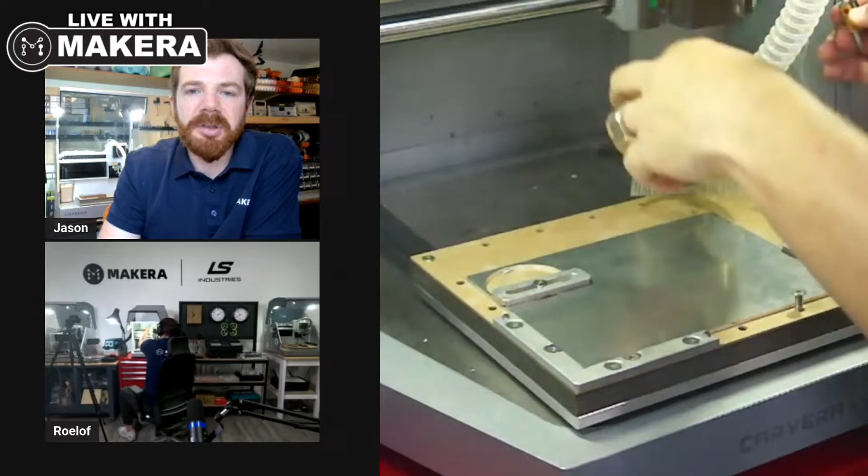You'll see that the Carvera Air is prompting. Of course, there's not an automatic tool changer for the Carvera Air, so this is prompting Roelof to load the wired probe, which is attached to the tool head. So Roelof's just going to insert that probe, and then the Carvera Air is going to run through and do the same probing and scan margin sequence that the Carvera did earlier. So very similar features, just a slightly different approach.

Actually, what you're seeing it do right now is it has a homing switch in the very back of the bed, and that is a really important feature. I don't know if a lot of folks realize what that does, but not only does it check to make sure that your tool is properly loaded, it also helps the Carvera Air measure the length of the tool every time you do a tool change. So it automatically offsets your Z heights for you, just like the Carvera does.

So we can see the scan margin there. Roelof did a perfect job at making that fit beautifully on that stock, away from his clamps and everything like that. Good position. Now it's just going to measure the height of that aluminum before prompting us for another tool change.

All right, now we've got the height. I think it's going to do another quick little tool change beep here, right? Yeah, for our tool. So we're using a 12 mil end mill. I'm just going to do that, and then replace this guy. No wrenches needed for a tool change. As easy as that.

And then you have two options. You can either use the controller to proceed, or you can just hit the top and proceed from there.

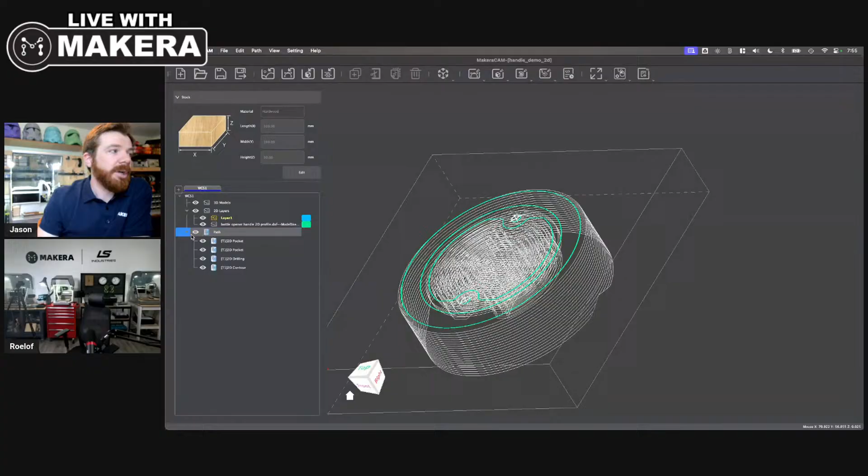The reason we want to share the 2D profile is, first off, you can create 3D parts using a 2D profile in Makera CAM. I can create a 3-dimensional pocket, I can create the other pocket just like Roelof did with the same tools and settings, a drilling operation, and then this outer contour.

But when you're working with 2D files, it gives you a little bit more flexibility for customization. Let's say you want to create your own custom bottle opener with your own custom handle design. Let me make my stock a little bit bigger to give myself more room to work with, and then I'm going to import a picture, not a vector, but literally a JPEG photograph, a piece of clip art grabbed from the internet.

Let's say I want to create a wrench-shaped bottle opener, and I could import any shape I want. So I'm going to use Makera CAM's automatic trace feature to trace this image, and that gives me this vector outline of the wrench. I don't need this part of the wrench, so I'm going to delete that and just grab this part.

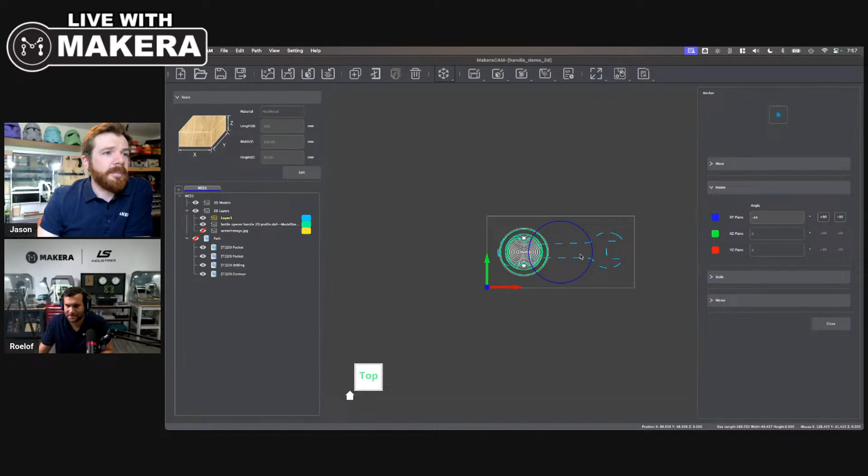Again, using Makera CAM, I'm going to rotate this wrench and let me scale it. Oops, not like that, let's see here. Actually, let me reset. Make this guy a little bit bigger. See if I can scale this like so, rotate—this might take me a second to get just right.

So it fits, I might have to make my stock a little bit bigger, or grab a different image. But here is my wrench—of course I would need to make my stock bigger. If I delete this outer handle line, and regenerate this contour, I generate the contour for my imported wrench. Now I can create a wrench bottle opener, though again I'd need to make my stock bigger.

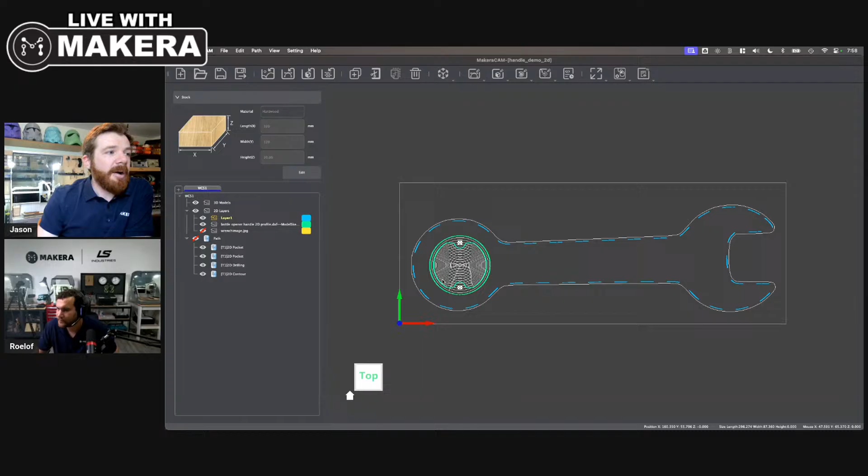So let's make this quite a bit bigger to actually fit this wrench on the bed of my machine. Now I could make a custom wrench shaped bottle opener, which, we don't have time for me to machine, but because I'm prepared, it would look something like this—hey, look at that. Sorry, my microphone cut out there for a second. Yeah, so look, a nice little wrench-shaped bottle opener.

So you can customize this, you can make your own custom shapes, and you can grab that profile along with the actual 3D parts that Roelof showed earlier.

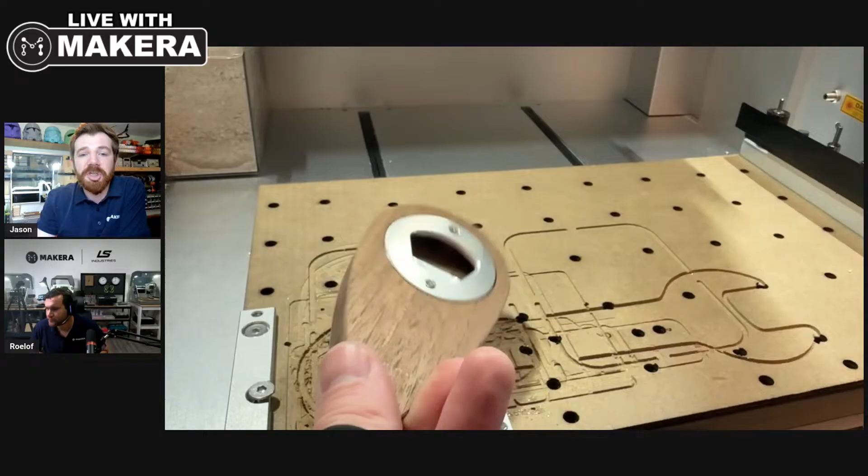Something else you could do that we don't have time for: the Carvera has a built-in laser engraver, and the Carvera Air has an optional laser engraving module, so you could utilize the built-in laser or the optional module with Makera CAM to import your image and prepare it for laser engraving, creating a really nice engraved image or logo on your bottle opener. That's another way you can customize this cool project, all with the same machine and software.

We don't have time to do laser engraving in this live stream since we're almost out of time, but everything I just showed you is included in the tutorial video for the bottle opener that's going to be posted to our YouTube channel after the stream, so you can see how to customize your handle, create laser engravings, and review all the cool stuff we're showing you in tonight's stream.

Yeah, it looks like it's almost done. Great stuff.

We're on the contour. I think it's done its second pause on the contour now. Cool, so just a couple minutes there to machine this bottle opener part out of aluminum with the Carvera Air. Pretty cool, yeah, it is.

Most of the time is also spent on the CAM, making sure everything is programmed correctly and the order of operations is done correctly, so that also takes some time. But the milling of the handle, that was about 10 minutes, and the milling of this is also about 10 minutes, or you can get it to about 10 minutes.

I'm also taking it easy on the feeds and speeds. You can run this machine double these feeds and speeds. We won't recommend that, but with the correct tool and the correct setup, you can actually get these things made quite quickly. That's a question we always get is, how fast can you run these machines? Well, they can run quite fast, but if you run it really fast, of course, all you're going to do is either break your bits or even dull your bits, right?

So we often get asked, how often do you need to replace your bits? They are wear and tear items, right, just like a saw blade and things like that. So you do need to make sure that you're using sharp bits and you're replacing them as they get dull, and more abrasive materials like carbon fiber and fiberglass will dull bits more quickly than, say, wood or epoxy. So if you want to get a long life out of your bits, slow your machine down. If you want to go into more production spec speeds and you have a budget for replacing bits, then you can push your machines to cut a little bit more quickly.

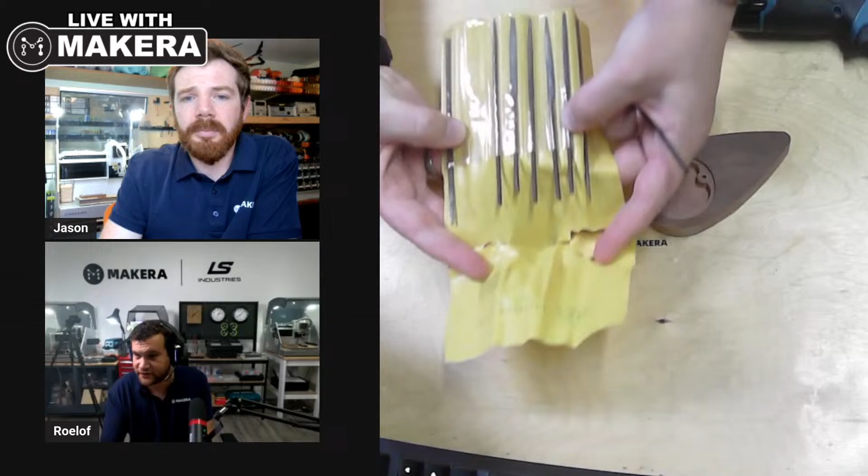If you're making small things and you just want to get some of the details out, just sand it slightly on the outside. And for this part, ideally you would also put a chamfer on it, just to get rid of that sharp edge.

We look at how to do the chamfer in the longer tutorial video too, so you guys can check out how to do some chamfers in our tutorial on this.

So if my tolerances were correct, that'll just pop. I still have a little bit of a tab over here.

Still got a little bit, not yet. Get it in there - I thought it was a nice little snap sound that you had. It was good, it will work now with that tab removed. I just have to put it in evenly.

Here we go, it's a friction fit, but it's in there. Perfect. The tab, I just need to sand a little bit more. There's the click - all right, there you can see it's nice and flat. Lovely, that's the good part.

And then I do have some screws over here that I'll just use to fix this in. Ideally, you would actually also chamfer these holes to have these screws not protrude. That's also something you can add, but it just takes some time - and that would be an inside chamfer. Again, we look at that in our tutorial video.